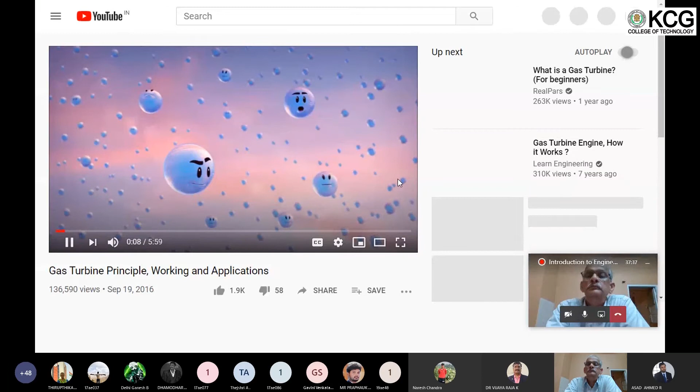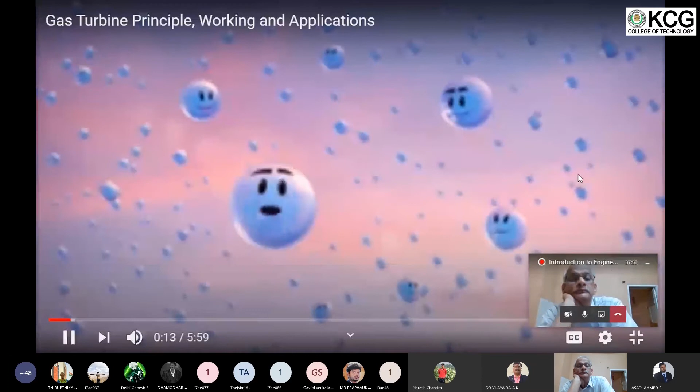Narrow body aircraft. Hey, my atoms are shaking. Strange, it sounds far, but I bet my last proton that beast is much closer than you think. Hold on people, it's a LEAP-powered aircraft. A leap into the unknown. What on earth is a leap? Something you sure haven't seen before. Everybody get ready, we're going in. Someone please tell me what just happened? Sure, the engine makes a plane move forward. Thrust is produced by air being pulled in by the fan blades. Then this air is ejected at greater speed through the exhaust, creating the required pushing force. This is the principle of Newton's law: for every action, there is an equal and opposite reaction. So how is this possible?

Gentle souls, come with me to the bypass. Extreme sport freaks, with me, we'll hit the compressors, combustor, and turbines.

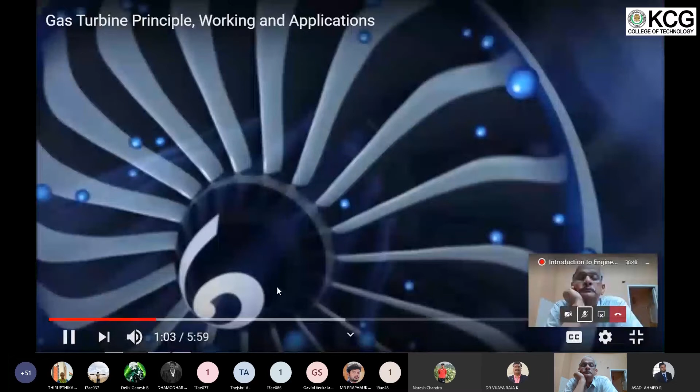The LEAP is a high bypass ratio engine, meaning a large amount of air bypasses the core of the engine to be ejected directly into the exhaust stream. The fan acts like a propeller, its curved rotating blades accelerating airflow into the engine. Lighter composite materials provide better efficiency and resistance.

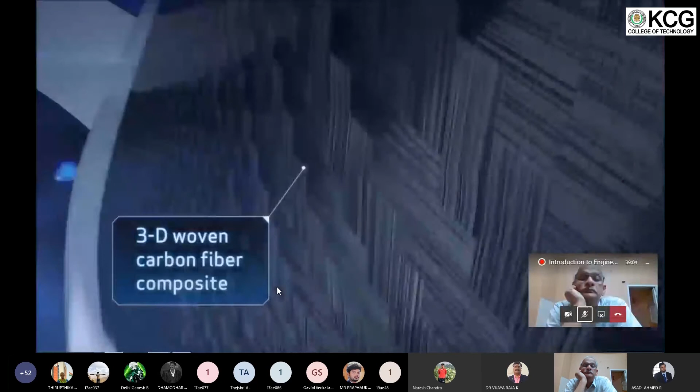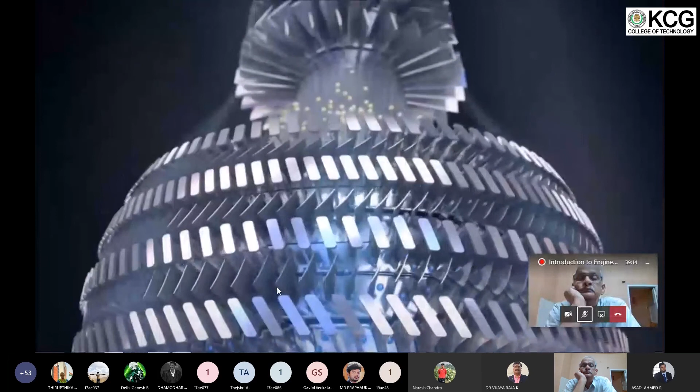Here come the compressors. Get ready, things are gonna heat up. Feel that? It's the low-pressure compressors squeezing us. Now the high-pressure compressors—you're gonna feel the difference. Ultra-efficient compressors deliver optimum air pressure and temperature conditions for combustion.

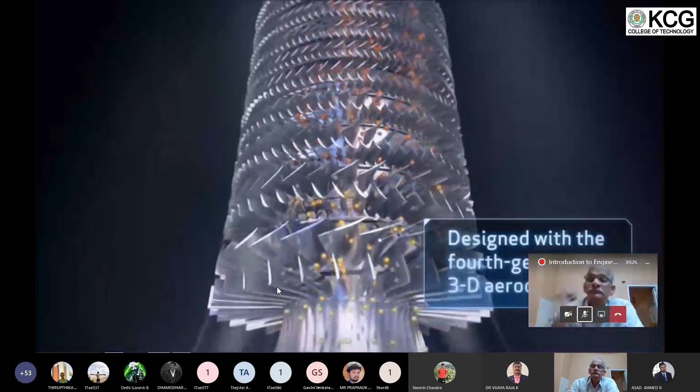It's rising up now, let's get toasted. Gentlemen, meet your kerosene counterparts. These guys are gonna light up your day. Already? We usually mingle inside. Not anymore. I thought there'd be more of you. Normally, yes, but in this engine fewer of us are needed. This little kerosene particle is right.

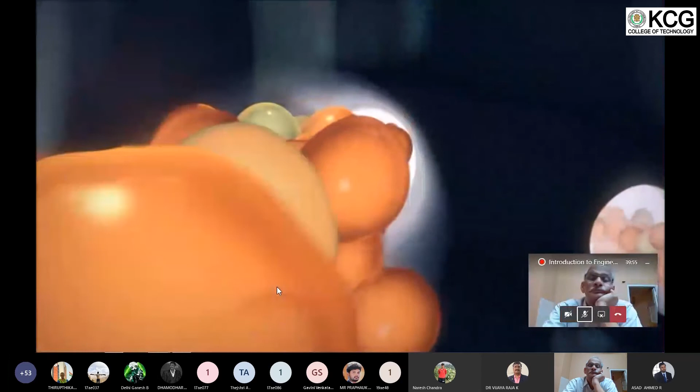The LEAP engine burns less fuel than former engines. In addition, the fuel nozzles mix fuel and air before they enter the combustor, creating a homogeneous mixture that minimizes the peak temperature during combustion. This technology significantly reduces emissions. Okay, let's go.

The combustion chamber—this is the heart of the engine, where energy is created through combustion of fuel and compressed air. Are you ready? Here comes the final blast.

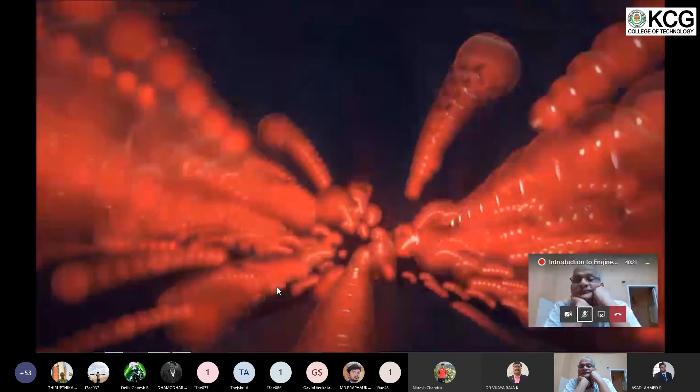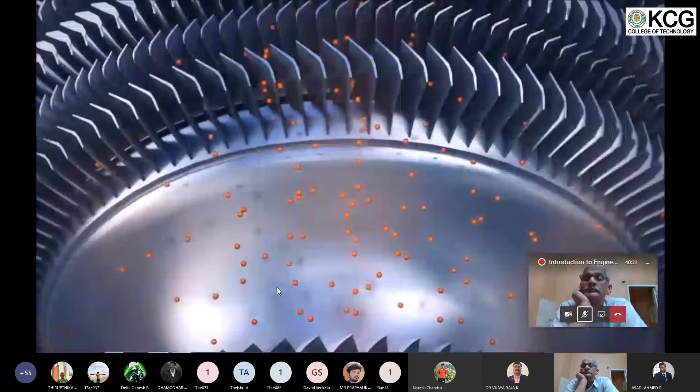What a boost! Where are we now? Turbines, let's transfer our energy to them. This is the last extreme stage before we join the shaft team. Enjoy. Advanced materials and aerodynamics make the turbines much more efficient and durable. The pressure and speed of the hot gases provide the force needed to turn the turbines and shaft, which in turn drives the compressor and fan.

Come on guys, don't hang around. We alone are responsible for 90% of the thrust from this baby. Here come those adrenaline junkies. So, how was it? Fast, hot, and fantastic. What a trip! Are you kidding me? It was us in the primary flow that did most of the job. Not exactly, kid, it's teamwork. We definitely need each other.

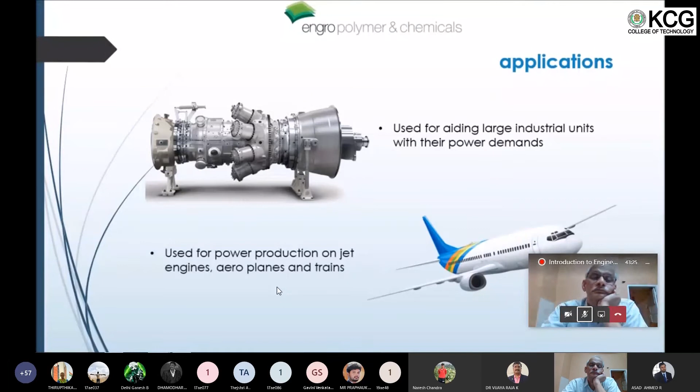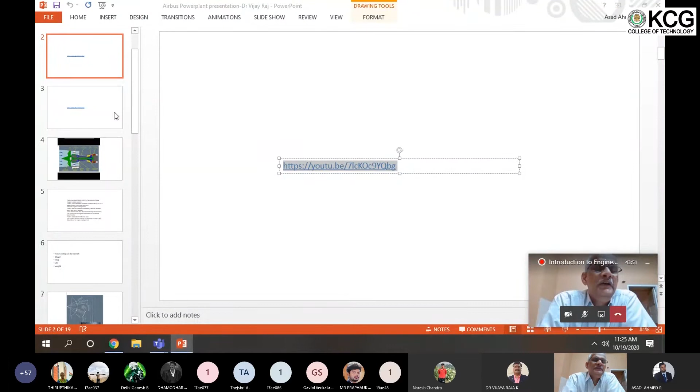As all of you have seen, a gas turbine engine has got an air intake in the front, then a compressor, which may be 2 stages or maybe 3 stages depending on the design of the engine. Then we have got a combustion chamber where the compressed air is mixed with the fuel and it is burnt, and the hot gases would be going to the turbine stages. Again, there could be single stage, 2 stages or 3 stages in the turbine. And then the hot gases will be going out of the exhaust pipe.

So in a turboprop engine, as I told you, the gas turbine will be driving a propeller and the propeller gives the thrust. In a turbofan engine, as you have seen already, in the front of the engine you have got a fan, and the fan gives the thrust, driven by the low pressure turbine. In case of a turbojet engine, you have got only compressor, combustion chamber, turbine, and an exhaust nozzle, and the exhaust nozzle is the one giving the thrust. So this is how the gas turbine engine is able to give us the thrust, or maybe power, on different types of engines. I will explain when I go to the subsequent slides.

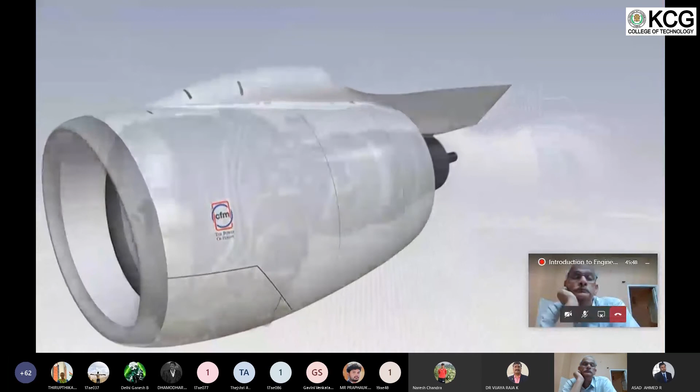How a CFM 56-5B turbofan engine works. To make an aircraft move forwards, we need a pushing force, or thrust, which we create by making the air accelerate between the front and the back of the engine. This is basically done by the large fan at the front of the engine, through which air passes at a high rate. These are the various components of the CFM 56-5B.

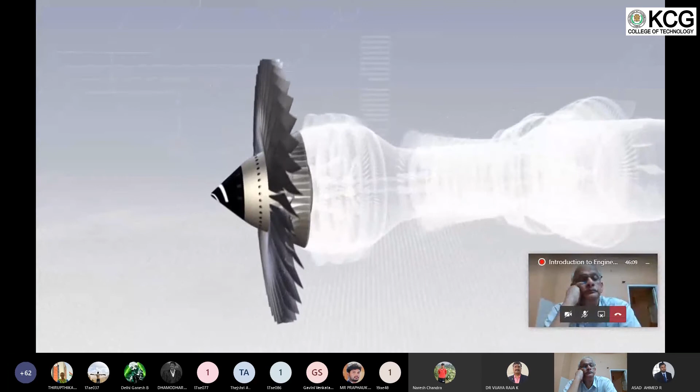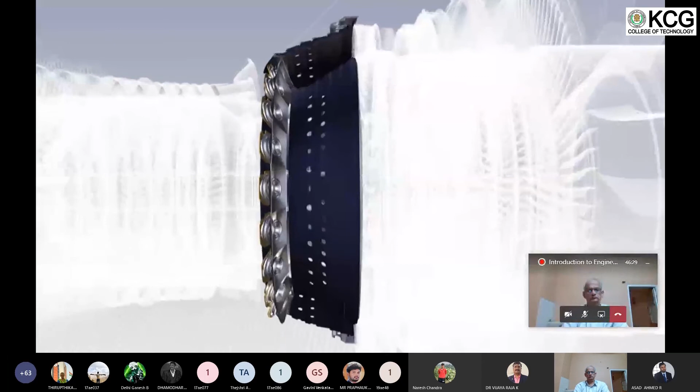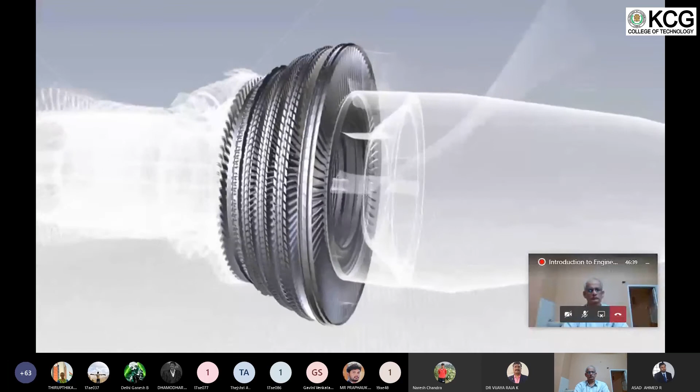The fan, which is a large diameter propeller. The low and high pressure compressors with 13 stages, which, step by step, increase the pressure of the air as it flows through them. The combustion chamber, in which jet fuel is mixed with air and burned. The high and low pressure turbines, in which the pressure of the hot gas is reduced as they drive the compressors and fan. There are 5 turbine stages, 1 high pressure and 4 low pressure. And finally, the exhaust assembly.

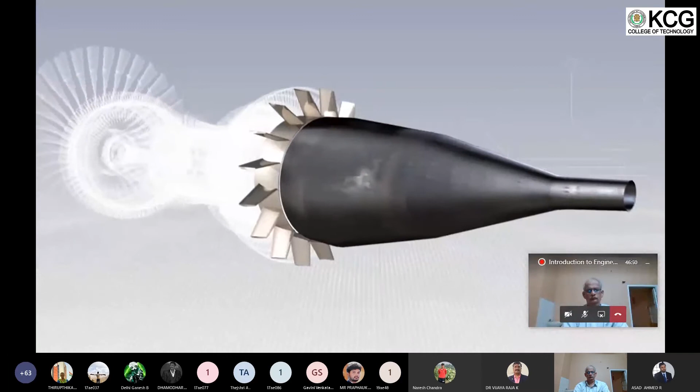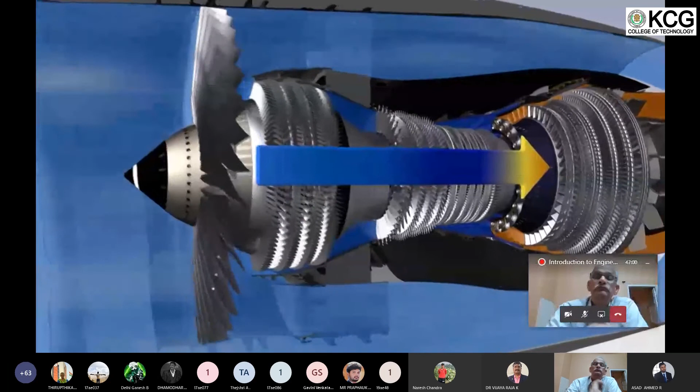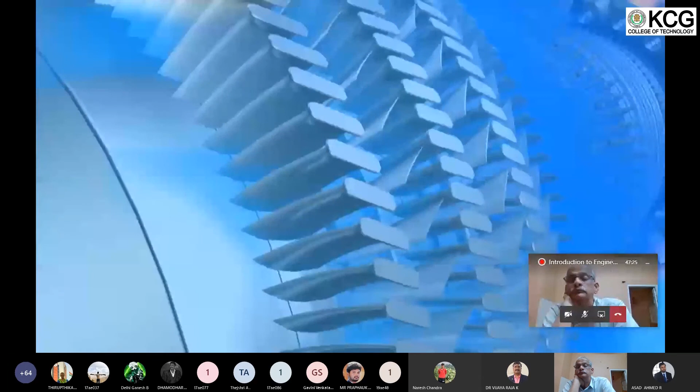The CFM 56-5B is a high bypass ratio engine. The primary flow passes through the combustor, while the secondary flow passes only through the fan. 80% of the engine airflow, accelerated by the fan, is directed into the bypass duct and provides 80% of the engine's thrust. The primary flow passes in succession through the compressors, the combustor, and the turbines, before being ejected rearwards through the exhaust assembly. The air is compressed in the low and high pressure compressors, and its temperature can reach 450 degrees Celsius, after which it enters the combustor, where fuel is injected and ignited. Burning the mixture of fuel and air brings the temperature up to 1700 degrees Celsius.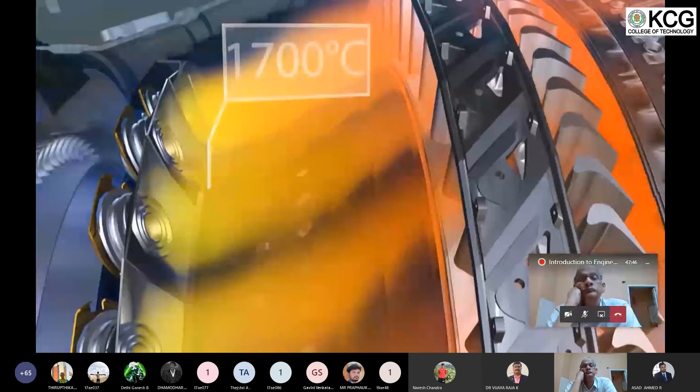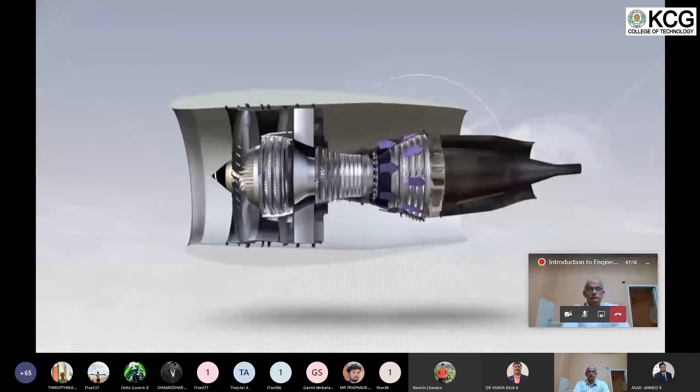Finally, the accumulated energy is extracted in the 5 turbine stages immediately after the combustion section. The pressure of the air drops as it passes through the turbines and makes them spin. And the turbines, whose shafts ride within one another concentrically, in turn drive the fan and the 2 compressors. The air is then expelled through the primary duct, joining the air from the fan stream.

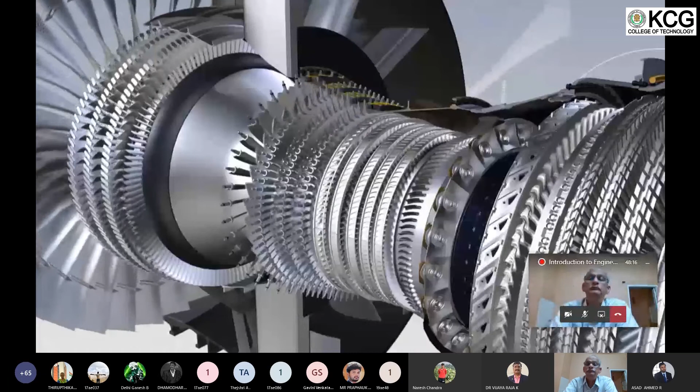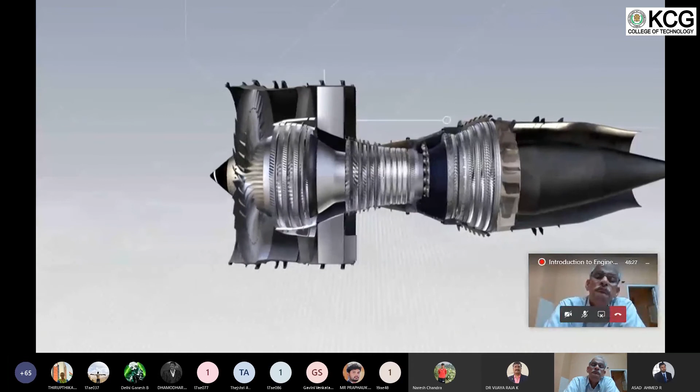A turbofan is therefore a four cycle engine. Air is compressed, then heated by burning fuel, after which it passes through the turbines, which drive the compressors and the fan.

Okay. No, you can cancel this. There is no need of that. Okay, this video is giving you again the same thing - what are the components of the gas turbine engine?

Here I want to just explain some terms that were used in this video. He was talking about the bypass ratio, and he was trying to explain it.

Bypass ratio is the ratio of the air which is bypassing the core engine to the air that is going through the core engine. Normally the bypass ratios on engines fitted to the A320 are around 5:1. That means 5 parts of the air is bypassing the core engine, whereas 1 part of the air will be going through the core engine.

The air that is going through the core engine is the one which is compressed by the compressors, mixed with the fuel and then burnt in the combustion chambers. This is the air which is going through the turbine stages also. The air which is bypassing the core engine is the one giving us nearly 80% of the thrust, so the aircraft will be moving forward whenever the engine is running at high power settings.

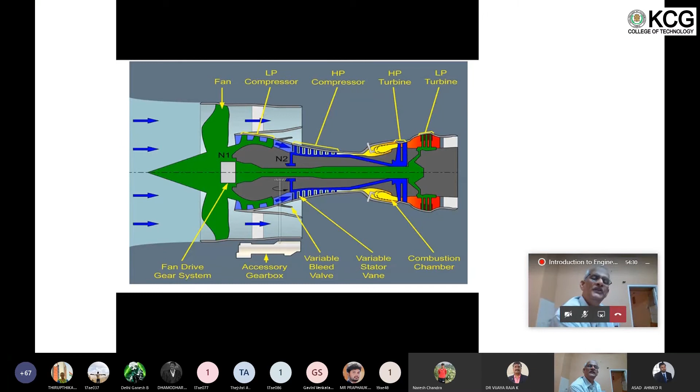This is the computer fitted in some A320 aircraft models, called FADEC, Full Authority Digital Engine Control system. Some aircraft also call this the Electronic Control Unit, ECU. It is a digital control system, a digital computer, which gives complete engine management.

For redundancy purposes, it has two channels: one working, the other on standby. If one channel fails, the other automatically takes control. As mentioned, it requires a dedicated power supply. There is an alternator driven by the accessory gearbox which supplies power to the FADEC. During the initial period of engine starting, it takes power from the aircraft power supply, and once the engine attains a particular speed, it depends on this alternator for its operation.

The FADEC is mounted on the fan casing, and there are interface units which connect it to other aircraft signals or resources.

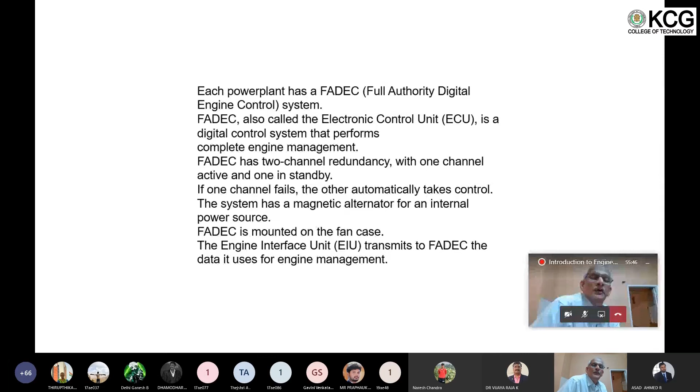Before going into details, remember there are four forces acting on the aircraft: thrust, drag, lift, and weight. Thrust always pulls the aircraft forward, drag pulls it rearward, lift pulls it upward, and weight tries to pull it down. A combination of these four forces makes the aircraft accelerate or decelerate, and makes it climb to higher altitudes or come down to a lower level.

During the takeoff run, the engines provide thrust so the aircraft accelerates on the runway. Once sufficient speed is reached, pilots observe certain parameters called V1, VR, and V2. V1 is the decision speed: once V1 is attained, whatever happens to the aircraft or engines, pilots have to get airborne, since they cannot stop the aircraft on the remaining runway. That is what is defined as V1, the decision speed.

VR is the rotation speed, the speed at which the aircraft has to rotate, meaning the pitch angle has to be increased. That is defined by VR. V2 is the speed the aircraft should attain when it reaches around 35 feet height at the end of the runway. These values are defined for every aircraft.

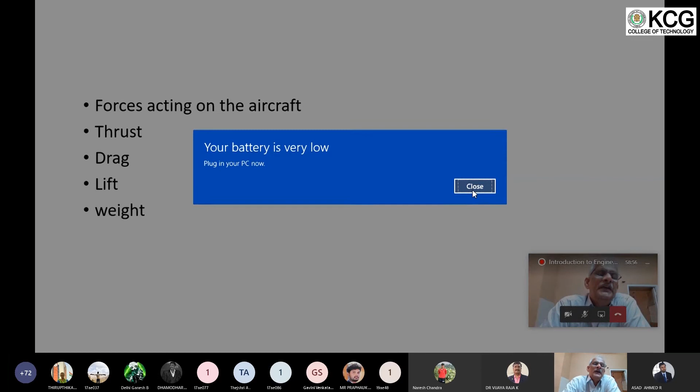Then when the aircraft is ready for landing, they will ensure sufficient lift and sufficient speed are available so that they can have a controlled approach and then landing. After landing, they have to keep the drag more than the thrust, so that the aircraft will be able to decelerate.

So these are the four forces acting on the aircraft when in flight: thrust acting forwards, drag acting rearwards, lift acting upwards, and weight acting downwards.

All of you might know there is a relationship between speed, angle of attack, and surface area as far as lift is concerned. If the surface area of the wing is more, it will give more lift. If the speed is more, the lift is also more. Similarly, drag also depends on the surface area, the angle of attack, and all that.

I will explain about drag and lift when I talk about some problems that the aircraft were facing in earlier stages of the A320 operation.

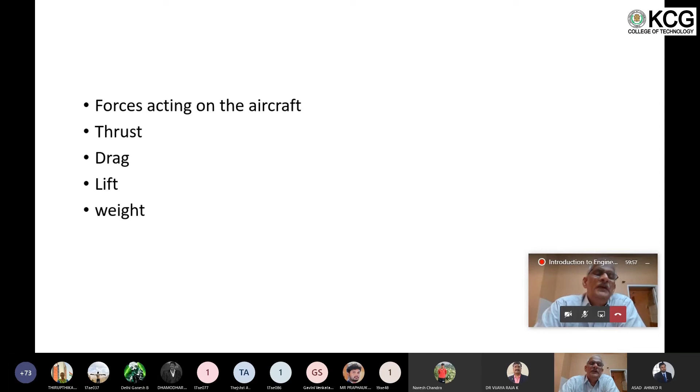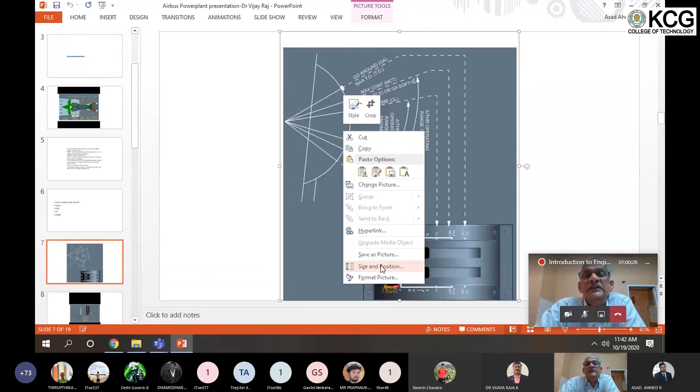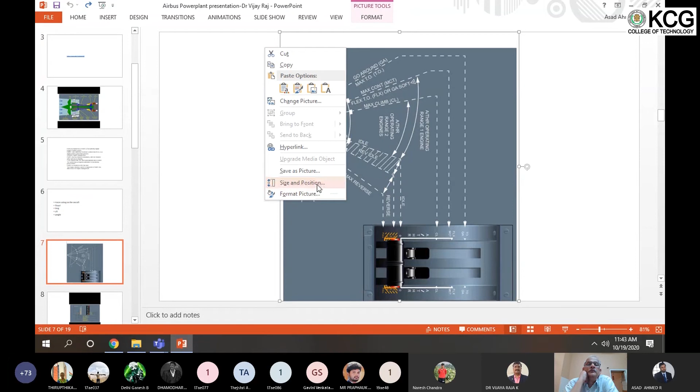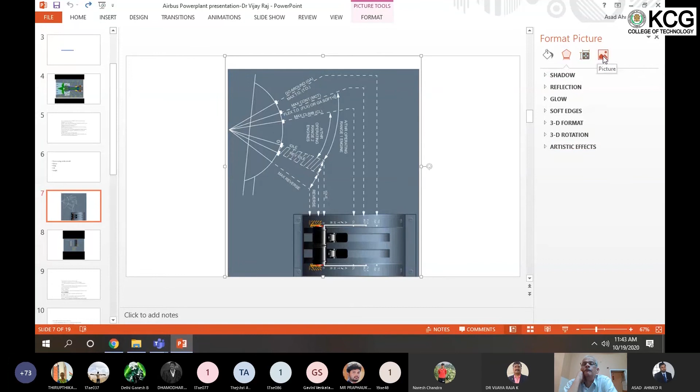Can you rotate it anti-clockwise, please? I don't know whether it is possible in this or not. Anti-clockwise. It's okay, I think we'll be able to see this. On the bottom of the slide, you can see that there are thrust levers. Yeah, now it is okay. So will you be able to increase the size?

On the right hand side, you can see there are two thrust levers which will be moved by the pilots when operating the engine. They have shown 0, that is the idle position of the thrust lever. Then they will move the thrust lever forward to TOGA, the farthermost position during takeoff, if they want full power on the engines. If they don't want full power, they will use flex takeoff thrust.

So that is the next position. Then there is one more position, that is the climb position, meaning when the aircraft is in climb, they will keep the thrust levers there. On the left hand side, from idle to climb, they write it as the auto thrust operating range with the two engines.

I will explain what auto thrust is a little bit later. For two engines, when the thrust levers are between idle and climb, the auto thrust will be working. For a single engine, the auto thrust will be working when the thrust levers are between idle and the flex MCT gate. And max takeoff thrust is used when the pilots require maximum takeoff thrust. Can you go to the next slide, please?

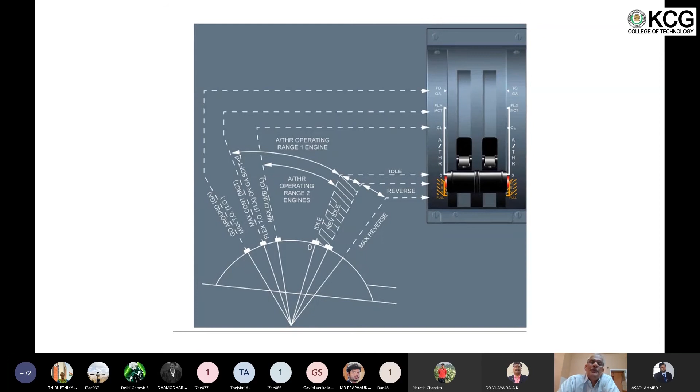Coming to the next item, that is what is called auto thrust, how it is protecting the aircraft. Before I go into this particular slide, I will narrate the reason for an accident that happened in Bangalore sometime in 1990, if I'm not wrong.

The flight was going from Bombay to Bangalore, and the pilots in the cockpit were both experienced pilots. They were flying Boeing 737-200 before they were trained onto this Airbus 320 aircraft. The takeoff was normal, climb, cruise, everything was normal.

When they were trying to approach Bangalore airport, they are supposed to take care of the thrust on the engine. Thrust can be controlled manually when the thrust levers are moved in the cockpit, so whatever the pilots are moving, the engines will give the required thrust. Or the thrust can be controlled by the auto thrust system also.

Auto thrust, if they are using, will be giving thrust in two modes. One is called thrust mode, another is called speed mode or variable thrust mode. In thrust mode, it will give either idle thrust or max climb thrust. If working in speed mode, it will give variable thrust.

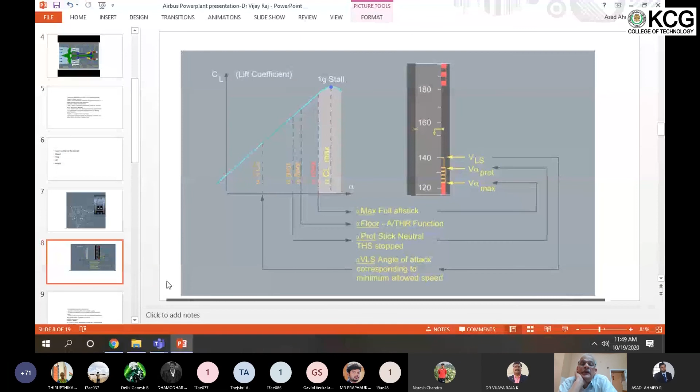Yeah, that is better, that is better. You can see on the left-hand side there is the angle of attack versus CL diagram, coefficient of lift. Angle of attack is given on the x-axis, and the y-axis has the lift coefficient.

Whenever the angle of attack is increasing, it will be giving more and more lift up to a certain point. Once the aircraft comes to the stalling angle of attack, the lift given by the wing will suddenly drop down. There are certain values given: one is VLS, the lowest selectable speed by the computers, then there is V alpha prot. I am not going to go into the details.

There is one angle of attack which is called alpha floor. Something happens when the angle of attack reaches this alpha floor value - the auto thrust will be working in the speed mode, thrust mode, and it will come to full toga thrust, that is takeoff go-around thrust. This is a protection given for the 320 aircraft, so that if pilots are unintentionally increasing the angle of attack with thrust at a lower value, the aircraft may not be safe. So they designed the aircraft to give maximum thrust from the engines whenever the angle of attack reaches this alpha floor value.

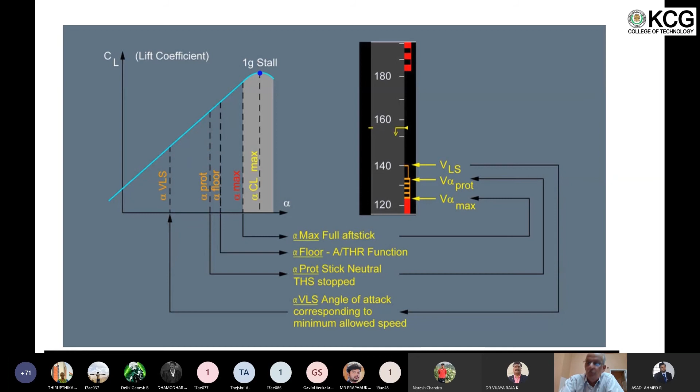So this is what I was trying to explain - auto thrust will be working either in thrust mode or in speed/Mach mode, that is the variable thrust mode. Whenever alpha floor comes into picture, it will give max thrust when the angle of attack is more than a specific value. In thrust mode, it gives a specific thrust, maybe idle thrust or max climb thrust. In speed mode, it gives variable thrust.

Another thing about alpha floor - whenever the angle of attack is more, it will give you toga thrust. That will be working only up to 100 feet radio altitude, so that when pilots bring the aircraft below 100 feet radio altitude, they should be able to control the attitude of the aircraft, pitch attitude, speed, and make a proper landing.

There was another crash connected to this particular alpha floor, which didn't come into picture, when the A320 was carrying out a demonstration flight somewhere in Toulouse. What they were trying to do was show people that without increasing thrust by the thrust levers, simply by pulling the nose up, the aircraft will go up. That's what they wanted to demonstrate.

So what they were doing was making an approach, and when the aircraft was close to the ground, they started pulling the nose up so that the angle of attack increased. They wanted to bring the angle of attack to alpha floor value to show that it would give toga thrust automatically. But they didn't notice that in the process, the radio altimeter reading had gone to less than 100 feet because there were some trees in their approach path.

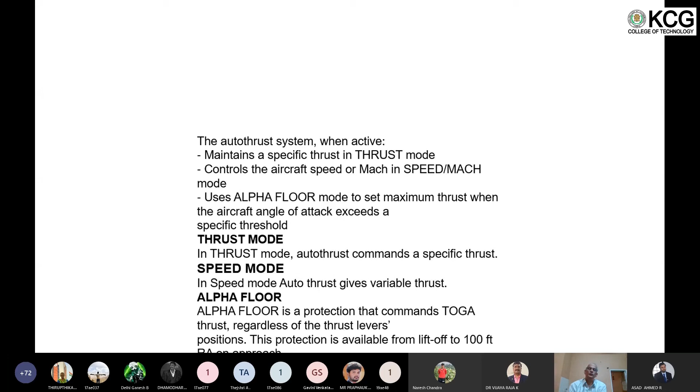Whenever the radio altimeter is reading less than 100 feet, the alpha floor will not come into picture. So the thrust didn't come up and the aircraft went into the other side of the runway. It went into some trees and then it crashed. So that is what had happened in the first crash of A320 somewhere in Toulouse.

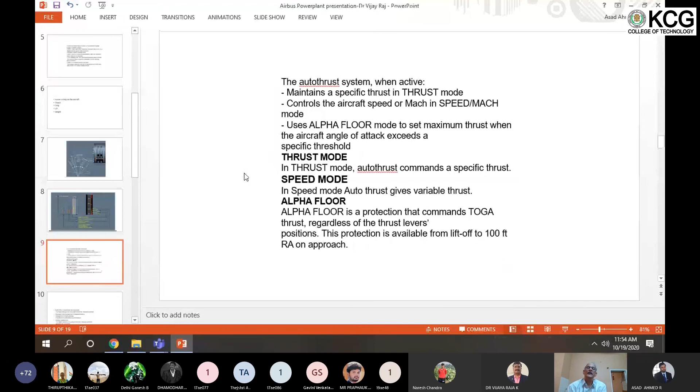Afterwards, the pilots are asked to notice what is the radio altimeter value whenever they are in the approach. There are some audio callouts that will be coming whenever the aircraft is in the initial approach and final approach phases, so that the pilots are reminded about the radio altimeter values. So that was another reason the pilots didn't notice it properly, and it led to another crash in the initial period of the 320 operations.

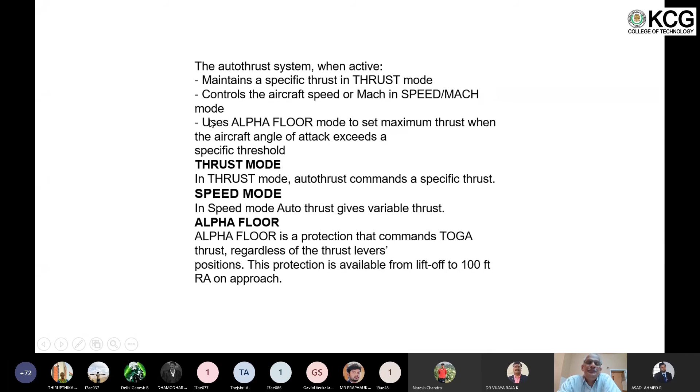So the computer that is controlling all these things is called FMGC, Flight Management and Guidance Computer. It has got a flight management portion and a flight guidance portion. The flight management portion manages the navigation, proceeding of the flight along the flight plan, whatever flight plan the pilots are supposed to follow when flying from point A to point B. It also gives the optimum speed so the aircraft will fly economically, and provides the displays in the cockpit so pilots can monitor how the aircraft is progressing.

Flight guidance part is also a part of the FMGC that has got autopilot command. If they engage the autopilot, it will take care of flying the aircraft. Flight directors are command bars available to the pilots, which direct them how to fly the aircraft, whether to go up, down, maintain attitude, or turn left or right. All those things are given by the flight director.

Then the last one is auto thrust, which is a part of the FMGC. This auto thrust gives you fixed thrust and variable thrust, and because of these reasons, as I explained, there were two crashes, one happened in France and another one happened in Bangalore. Next slide, please.

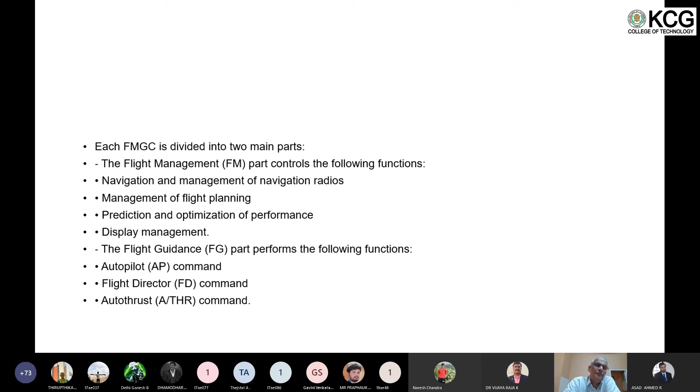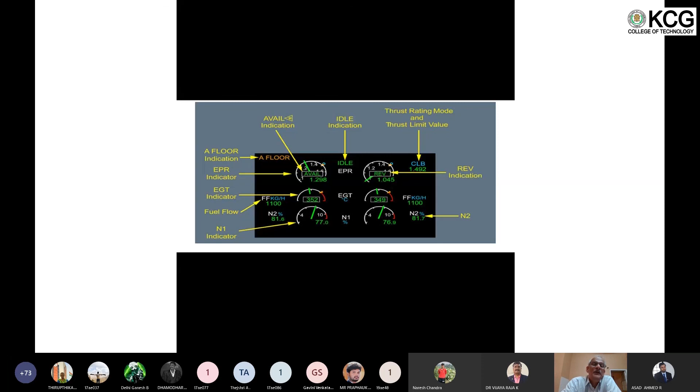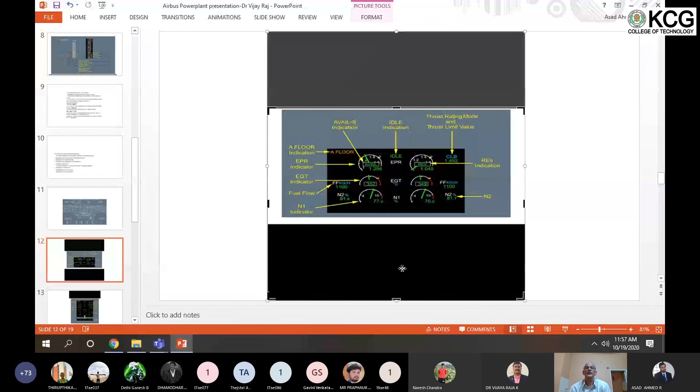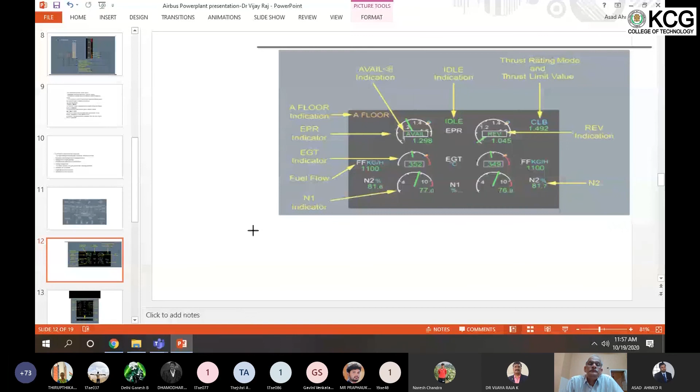There are certain instruments which pilots will be monitoring in the cockpit. So here you can see the EPR indication.

It also has got alpha floor indication, which you can see on the top left hand side. Whenever it is activated, the pilots will come to know when they get this indication on the display units. Inside the EPR indication, you can see 'avail' on the left side, meaning the reverser is available, and 'reverse' on the right side, which is shown when the reverser is deployed. So these are all the instruments the pilots will be monitoring when they are controlling the engine.

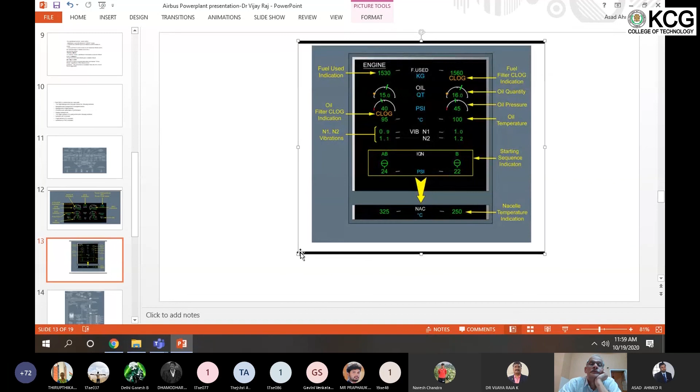So these are some of the other indications that the pilots will be monitoring. Fuel used, how much fuel is consumed by the engines, left engine and right engine. Then what is the oil quantity used for lubrication of the engine, what is the oil pressure, oil temperature, because they are supposed to monitor a particular value of the oil temperature and oil quantity. Then vibration, N1 and N2 vibrations, the pilots will be monitoring these values also.

So there were some problems which are connected with the compressors in the initial stages of the IAE engines.

When they were designing the engines, they tried to maintain a very minimum gap between the compressor blades and the compressor casing so the engines would work more efficiently. But when the engines were operating, thermal equilibrium problems caused the casing to take an oval shape. In some areas there was more gap between the blades and casing, in others less gap. As a result, the blades were rubbing the casing in some areas, getting fatigued and damaged.

So when the engines were in operation, especially in Air Lanka using these IAE engines, they noticed some cracks in the compressor blades. IAE removed the engines and the compressor blades and found that the damage was because of the uneven expansion of the engine casing.